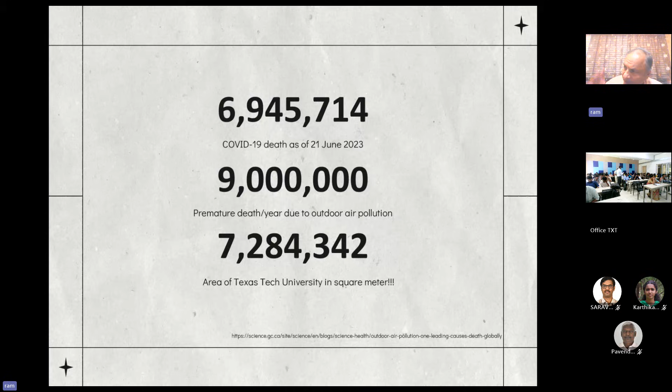And then when you compare that, roughly about 7 million people have died of COVID. Similar size is the size of the university. It is 15-20 times the size of the KCT campus. So American universities are big. So it is very important.

How do we develop products? So if you are a BTech student, probably if some may own a company, you may want to develop new products. How do you develop new products? Technical textiles are developed based on this formula 4S, S as in sugar or S as in Sangeeta, whatever it is. So you have to first sense, so what should I develop? What should my company make?

Then based on that, you should model how much each product will cost. You would study this in your project management in the 4th year. Most of you are finals, so this you would have already studied. So it is modeling or forecasting. First, sense. What is the requirement? We now know, apart from knitting garments, apparels, in India, people are putting more thrust on technical textiles. So we have already sensed the need. And then what products in the technical textile sector you need to make, that is modeling or forecasting or shaping.

Then when you model, okay, I want to develop a personal protective equipment, I want to develop a body armor, then two applications emerge, whether it is just used to protect the human beings or environment, use and throw, or these textile materials will be able to not only protect, but also sustain you to carry on. If you are in a war field, you need to have a chemical protective wipe to protect you from the toxic chemical. Once you wipe your body using these wipes against chemical warfare, you will be able to sustain and move on until you are getting some medicines or medical countermeasures. So this formula, 4S, sense, shape, sustain, shield. This you have to remember like a mantra.

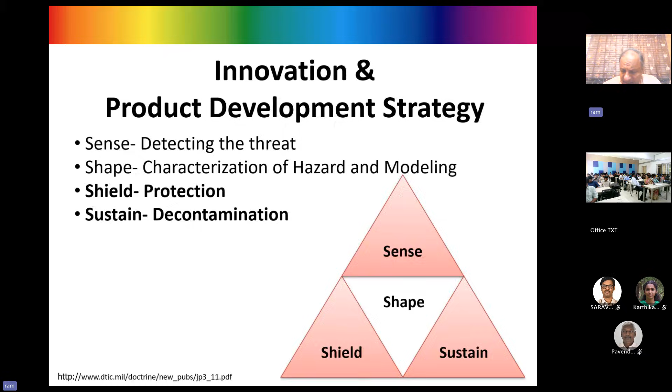So new materials yield to new applications, and one great value BTech and MTech can bring to the table in the textile sector is to add sustainability. Sustainability doesn't simply mean materials. Sustainability is energy sustainability, economic sustainability. So you have to make a product which can compete against Bangladesh, against Vietnam, against Turkey. So that is known as economic sustainability. Then environmental sustainability is, of course, using natural materials, and energy sustainability, you also have to make the product using less energy. So all these are important.

So this is what we call, like I said, I always give simple formulas. So if you have to develop a new product, you need to have 4S: sense, shape, shield, and sustain. Similarly, sustainability goals are economic sustainability, how to make the product cheap; how to make a product with less energy, energy sustainability; how do you make a product which will not put too much carbon load, environmental sustainability. And then the elemental sustainability, I call it manufacturing sustainability. Can you make this product in a cost cutting fashion? That is elemental, environmental, energy, and economic. So all these you will see.

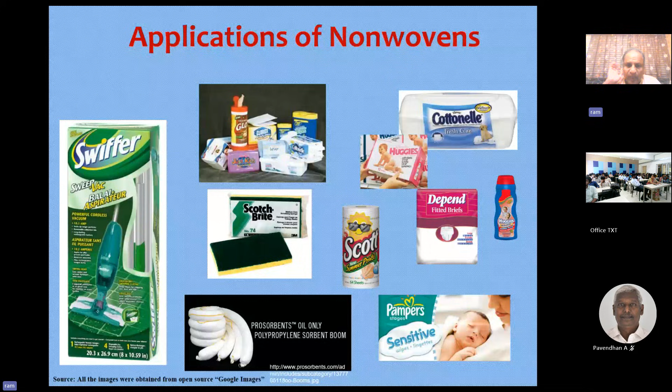Now, having said that, our laboratory was the first one to show discounted cotton. Most of you are in textiles, so you would know how cotton is graded. Cotton is graded using high volume instrumentation, based on its length, strength, uniformity, contamination, and micronaire. Micronaire is the unit for maturity. Higher mature cotton will take up more dye. Low micronaire cotton will not be able to take more dye. If it is not taking more dye, weaving mills are not interested in paying more for that cotton.

So what do you do with cotton which doesn't take dye, which cannot be printed as well as good cotton? We can use that cotton to develop single use products like this wipe. So this was one of the first works which shows that discounted cotton or low micronaire cotton can absorb more crude oil than synthetic material, than polypropylene. And we were the first to show and prove, using toxic crude oil, that cotton is a very valuable raw material to develop technical textiles.

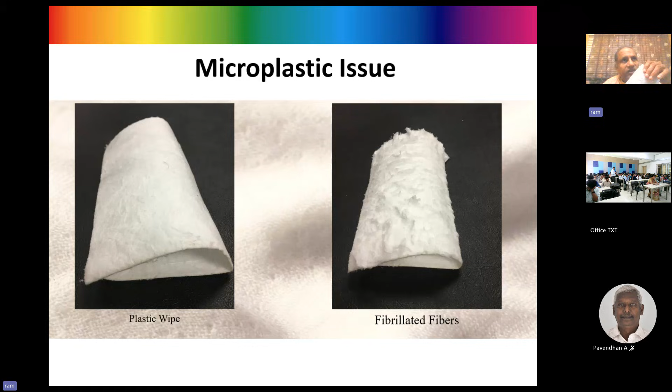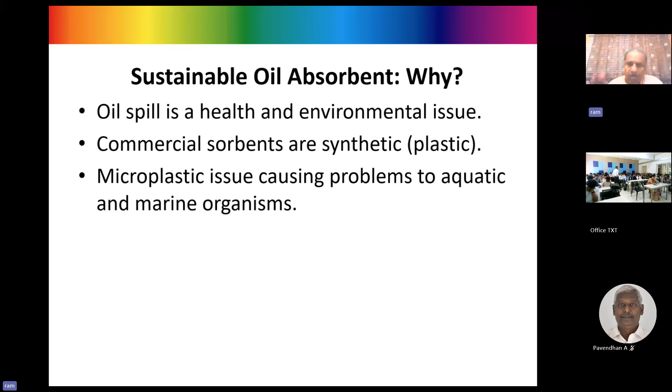Now, so why do we need this? Oil spill is a health and environmental issue. As I told you, most of the absorbents that are used are made out of polypropylene using a process called meltblown. And these meltblowns are not bonded. They are very loose compared to other bonding methods. So the chance of giving away microplastic is more. So the microplastic issue is causing problems not only to humans, but to aquatic and marine organisms. So it is very important that we use cotton, and cotton can be expensive.

So we found that we can use a cotton which is discounted. How do you get low micronaire cotton? You get low micronaire cotton if the plant doesn't mature. The plant doesn't mature if it's so hot. Now, in the United States, cotton is grown only one time a year, May through November. They plant it in May and harvest in October, November. So June, July, August is summertime, 3 months behind India. So it is very hot. Most days are 37 to 40 degrees centigrade.

If you don't get enough rain that year, and the temperature is about 37 degrees centigrade to 40 degrees centigrade or even above, the plant doesn't mature well. When the plant doesn't mature well, harvest doesn't happen. And even if harvest happens, the sugar content, the cellulosic content of the cotton fiber will be less. So those cotton fibers will be discounted. So we are taking that cotton.

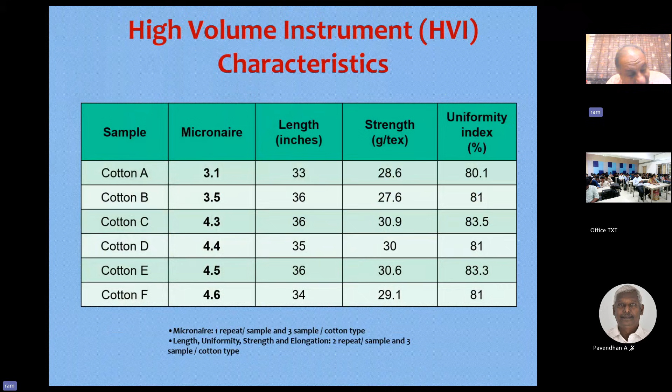When it is less mature, you are able to get that cotton relatively cheaper. So 3.1 to 4.6 is the range, and 3.1 is lower micronaire. What we have to show: the lower the micronaire of the cotton, or the lower the maturity of the cotton fiber, the higher will be the absorption. So let's see how the results come.

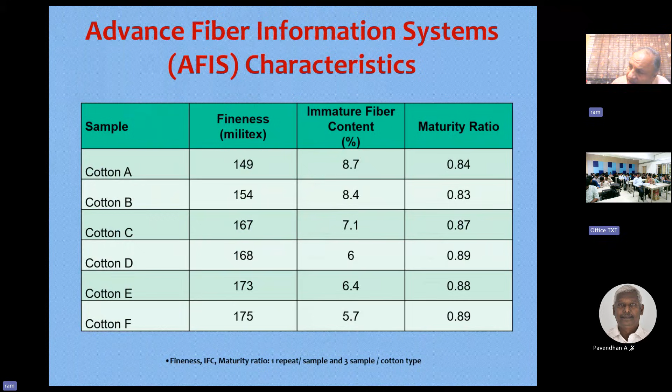Okay, so you take crude oil, take a small quantity of cotton, soak it in the crude oil for 5 minutes. Then take that cotton and drain it for 2 to 3 minutes, so that you are actually measuring only the amount of oil absorbed into the cotton. So we know the bone dry weight of the cotton before soaking. Now we know the weight of the cotton with oil after soaking. The difference calculated as a percentage gives the amount of oil absorbed by the cotton. Okay, this is the principle.

Now I'm going to show you. So seeing is believing. Are you able to see the slide and hear me? Okay, now I'll show you the experiment. Yes, sir, I'm listening. Okay, students, now I'm going to show you the demonstration. So tell me if you are not able to see the actual demonstration.

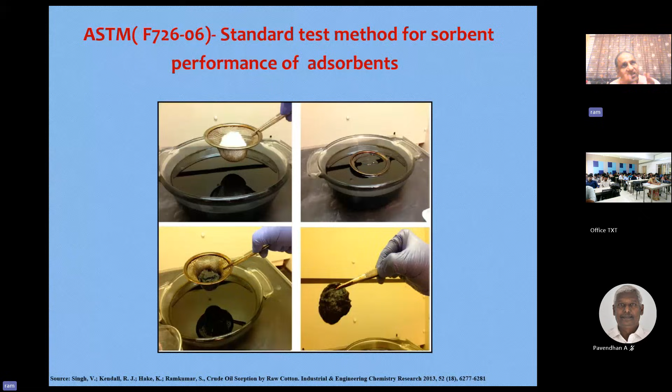That is one example. What I should show, I should show the low micronaire cotton 3.1 compared with the regular cotton of 4.3. 3.1 should absorb more oil. You see this. Why? Because I already told you 3.1 micronaire cotton has higher fineness. When the fineness is more, you can pack more cotton in a given area. When you are packing more cotton in a given area, the surface area increases. When the surface area increases, adsorption and absorption increases. Physical chemistry.

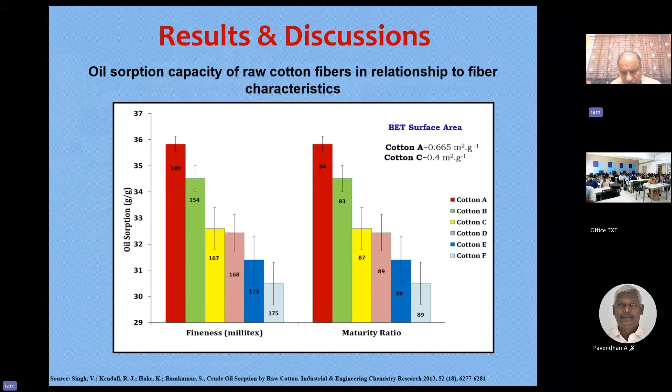So we published this in American Chemical Society journal. First ever work to show low micronaire or discounted cotton can pick up more oil than even regular cotton or even synthetic fiber, and that became global news all over the world. People picked up, and you can see we could correlate low micronaire cotton has a higher wax. When it has higher wax, the wax will stick to the oil and it will separate oil from water. So all these have been proven, and this is the mechanism.

First ever scanning electron microscope to show that individual cotton fibers not only hold the oil on the surface, they also sink it in. So that's why you can see a single fiber blossoming into a balloon. So it becomes like a crucible. It becomes like a vessel which will hold the oil. So that is the reason oil is held by cotton. Low micronaire cotton, higher surface area. The wax on the cotton helps to repel oil and water, and then it gets absorbed, and each individual cotton fiber is able to hold oil.

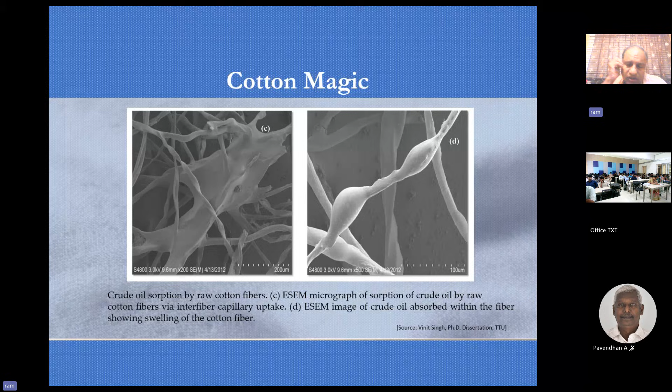So you could see the beautiful environmental scanning electron microscopy to show that the oil gets absorbed at the elemental level, individual level. And this is the difference between a low micronaire cotton and a regular cotton. Low micronaire cotton, there is no cellulose deposition. When there is no cellulose deposition, it collapses. That is the reason if the micronaire is less, you would know in spinning that the end breaks will be more. So that is the reason spinning industry do not want low micronaire cotton.

And then how did I prove? In any thermal plants or nuclear plants, they use a lot of transformers, because they have to transport energy. To cool those transformers, they keep them in oil. And when the heat becomes more, the oil starts spilling away. And this is a thermal power plant near Ennore in Chennai. So we have done some field studies using 100% cotton material.

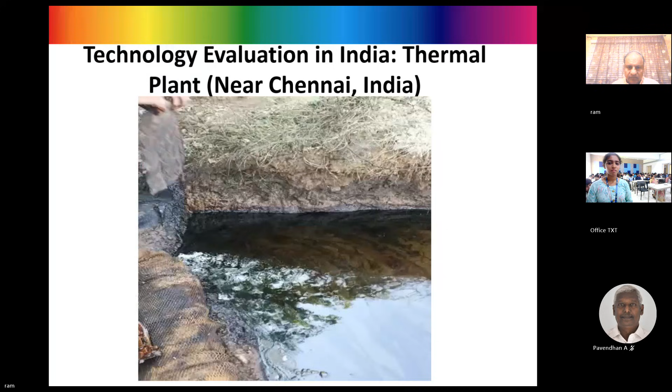Sir, how much oil does it absorb, sir? Very good. Very good. Look here. If we take motor oil, about 1 gram of cotton will absorb 50 times its weight. That means 50 grams of oil. This is motor oil. And similarly, when you take higher micronaire, the amount of oil absorbed will be less. It's around 40. Whereas the low micronaire cotton absorbs 50. 1:50. 1:40, 42. So 1 gram of cotton is able to absorb 50 times its weight.

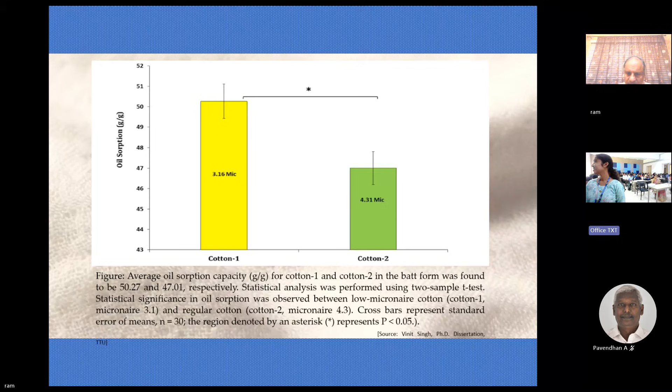1:50. That means, assume that there are 200 grams of oil, then divided by 50. So only 4 grams of cotton you have to put. Okay. Thank you, sir. Any other questions, ma'am? So you have listened to all the basic things as well as the demonstration. So I think that's a good question. So anything like what type of non-woven structure, anything you want to ask, you can ask.

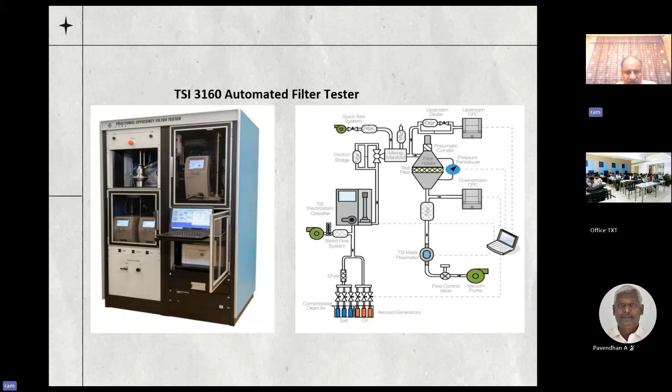Okay, so we proved that this filter technology will be able to give protection. I've finished the product. Your professor gave me a challenge, because in his class I have to talk about cotton and non-woven, cotton and woven, and developing them into technical textiles. The first product I showed you was 100% cotton non-woven for environmental protection. In the second, filter technology, I showed you cotton blended with spun bond, melt blown spun bond material to develop a face mask.

What is the application of the oil sorbent? What is the application of the face mask? The application for the oil sorbent is environmental protection because you are trying to clean up the oil spill, whereas the face mask is life-saving. So, two products. Now, how do you develop new products? What is the mantra? First, you should sense what the need is. Then you have to model and forecast. That's the project report. That's shape. Then sustain and then shield.

A simple chart I will show you: areas where an entrepreneur can come in. A Tirupur knitting entrepreneur, how can he diversify into a technical textile product? Defense textile, protective textile. Protective textile is categorized into 3 main areas: defense, medical, and consumer. Defense in ballistic protection, nuclear protection, thermal protection. Consumer, like wipes. Medical: face masks, drapes, medical gowns, head caps, shoe covers, etc.

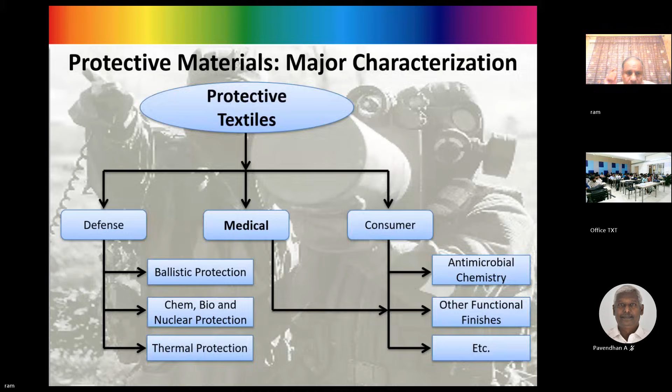but these are areas where a lot of research can be done. If somebody is interested in research in India, what is the agency that does this kind of work? Defense Research and Development Organization, DRDO, and they also sponsor students for summer internships. One lab is in Kanpur, another lab is in Bangalore. Whoever is interested can apply for a paid research internship. They pay 20,000 to 30,000 a month for the internship.

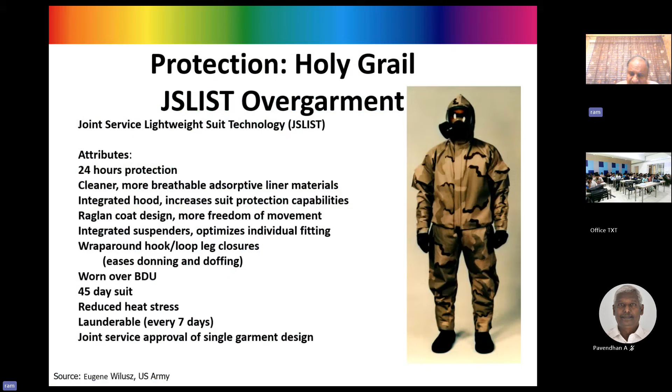Same needle punching, but I have to protect soldiers from toxic gas. So I took one non-woven layer and then, in the middle, I put activated carbon, like a bread sandwich.

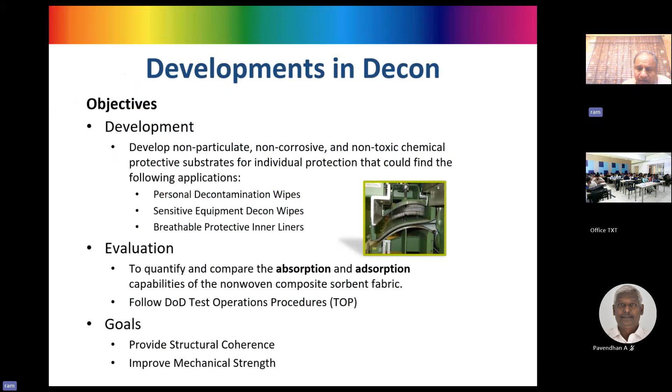You are seeing the picture now. One set of needles will punch from top to bottom, another set of needles will punch from bottom to top, and it will sandwich without any chemical. So again you can see the black layer, which is nothing but activated carbon, carbon powder. But it is not powder, it is made from a knitted fabric.

You steam activate that knitted fabric, made from polyester or polyacrylonitrile, whichever you can use depending on the cost, and then make it as an activated carbon and sandwich it between either two cotton layers or two polyester layers and needle punch. In the product, see, this is what it is. Top needle punch, activated carbon in the middle, bottom needle punch.

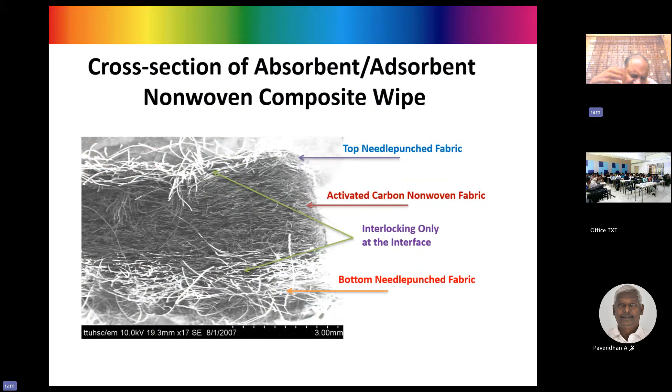The top layer will wipe away the liquid. Polyester and cotton blend, and the liquid gets wiped. And then when that liquid transforms into a vapor, the middle activated carbon will be able to hold the vapor.

Understand? Third, if I could add nanoparticles, or nanofiber, into a cotton fabric and put it in water effluent treatment, here titanium dioxide nanoparticles embedded in the cotton layer or polyester layer, in the presence of sunlight, that titanium dioxide acts as a catalyst, and then it is able to cleave the dye molecule.

Dye molecules, for example rhodamine A, rhodamine B, these are there, right? So the titanium dioxide serves as a catalyst, but the titanium dioxide is photocatalytic. That means it needs light. Most of the effluent plants are in sun rays, because they are all in Tiruppur, Vietnam, Thailand.

So heavy sun. So you just put this in the effluent, and when the sun rays hit this titanium dioxide embedded material, titanium dioxide catalyzes, and then it gives free oxygen. That free oxygen goes and interacts with the dye, and it breaks down the dye. So the carcinogenic effect, the cancer causing effect of the dye gets lost.

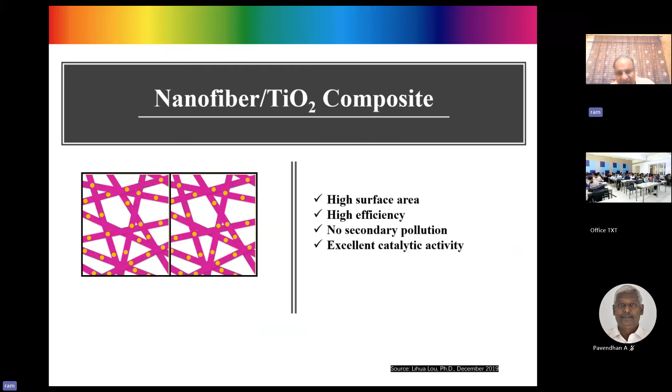This is another technology. Nanofiber titanium based compound. What are we doing here? We use nanofiber, and because we use nanomaterial, high surface area. Fourth product I have shown. And you can see this is rhodamine, red color. Rhodamine is red dye.

Then when you put this titanium dioxide material, slowly the red dye breaks down into small particles, and those small particles are not toxic, whereas when they are put together they become toxic. And with the titanium dioxide action on the rhodamine, the color changes. So the toxic effect is shown as the red color. That's why the rhodamine red comes in the dye.

I am showing one dye, and the color will be red. But once these catalytic particles hit, the dye gets disintegrated at molecular level. You can't call it powder; the chemistry breaks down at molecular level. When it breaks down, within 12 hours, you can see the toxicity effect goes down. And in perfect 50 days it will be clear. The pollution will go away.

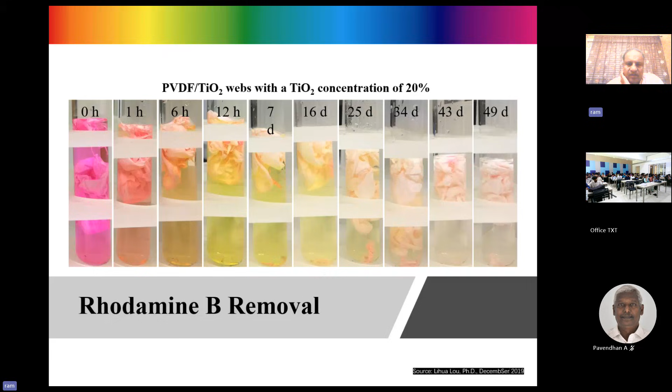This is a functionalized particle, nanofiber particle. And we develop all these. And one advantage in America is even high school students do research. In our place we do projects in B.Tech, that's when we start. But in United States, high school students engage with university professors during summer or during weekends and start doing research. And we tend to encourage high school students, undergrad students, graduate students to do short-term and long-term projects.

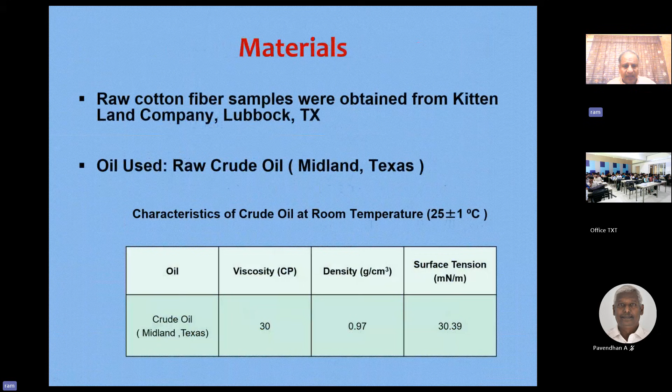So like this, now I had shown you result on cotton fiber. Taking the same, can we build a fabric out of it, non-woven fabric out of it? Yes, you can build a non-woven fabric out of it. Same result, 1:30, 1:40. See, you simply take this cotton, what is this? This is a mini card, and then just needle punch it and develop a batt.

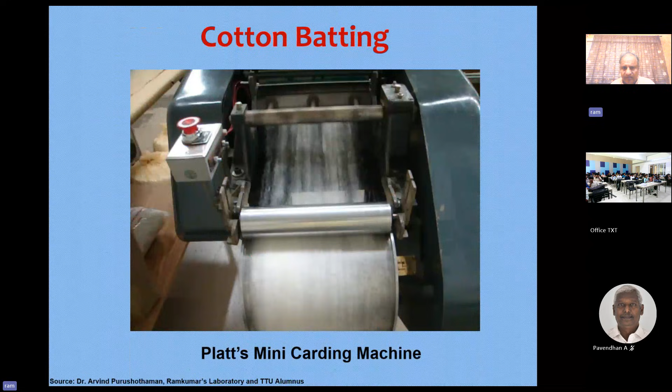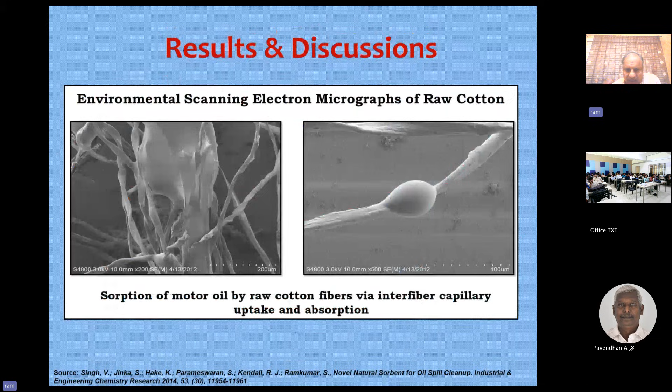Again, the same results you are getting. So one girl student asked this question, how much it absorbs? 1 gram of low micronaire cotton absorbs 50 grams of this oil. If it is crude oil, because it is more viscous, the absorption rate may come down.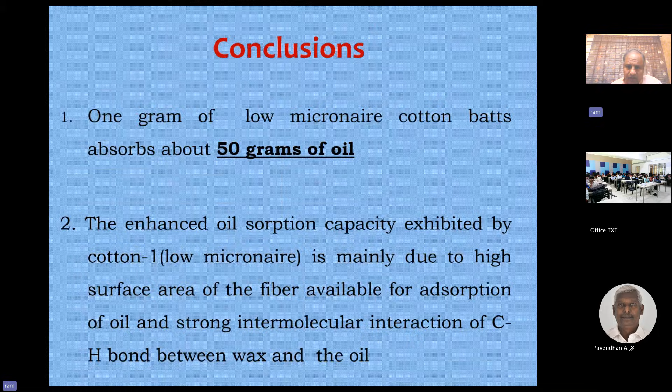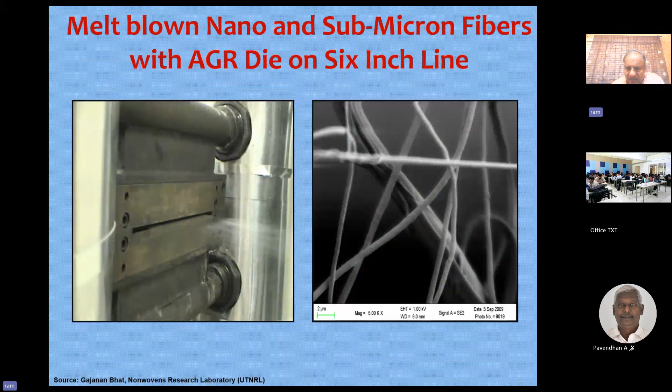You now know how to make melt blown. இதுதான் melt blown fiber. The polymer comes through these nozzles. Hole இருக்கு இல்லையா? These are all micron size holes, 2 micron, 1 micron. And through the holes these fibers come and then they condense and then they make the filament. இதுதான் நான் காமிச்சேன் இந்த spun bondல. This is also one project we did.

And so what is the outcome? Exactly, I will not hold you beyond 10 o'clock. I guess it is 11 o'clock, right? 9 to 11. It's about 11. We still have, we will give room for some questions.

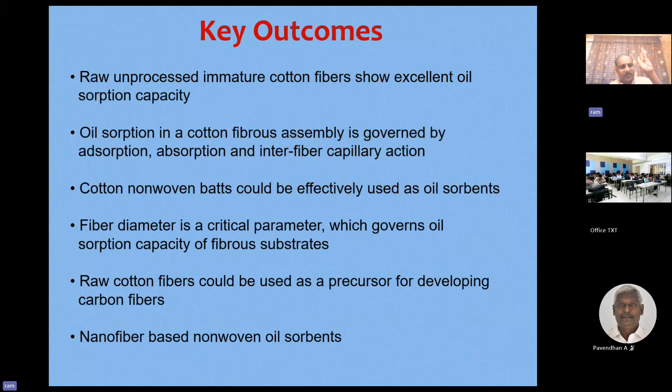Raw unprocessed. இதுல எந்த chemical processing இல்ல. Just 100% cotton is an oil absorbent. Cotton non-woven can be used as a technical textile. And nanofiber materials using melt blown can be used to develop so many products. அது ஒன்னு காமிச்சது, and the dye cleaning effluent.

So, what is the future of textile? Of course, knitting, apparel, இல்லன்னு சொல்லல. But the future lies in sustainable product development. Future lies in technical textile product development, as long as the technical textile product can help to protect the environment and save human life.